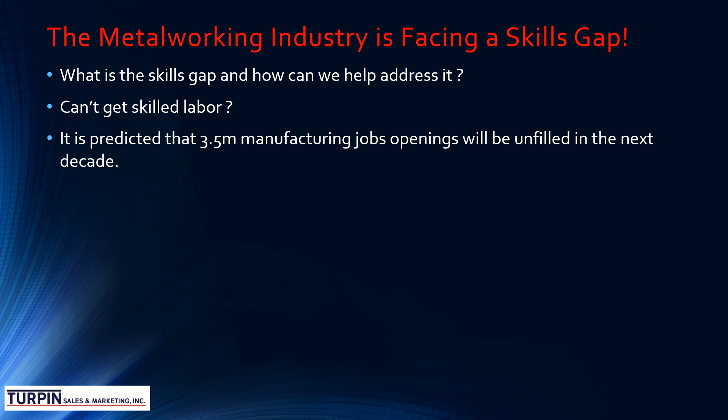The metalworking industry is facing many challenges right now: supply chain, material availability, but I believe the biggest one we're facing is the skills gap. So what is the skills gap and what can we do about it? The skills gap is basically a shortage of skilled labor in the manufacturing and machining industry. No one's going to trade school, no one's doing apprenticeships, skilled labor is very difficult to find. It's predicted that 3.5 million manufacturing jobs will be unfulfilled in the next decade, which will be devastating for this industry. So what can we all do to improve this situation?

Do you have existing employees that have an interest in manufacturing? Maybe you hire a person with mechanical aptitude, good work ethic, but no manufacturing skills. So what's the solution? Train your own. So Turpin Sales and Marketing have put together a very basic series of training presentations to help inspire people who may want to know more about this industry and help bridge the skills gap.

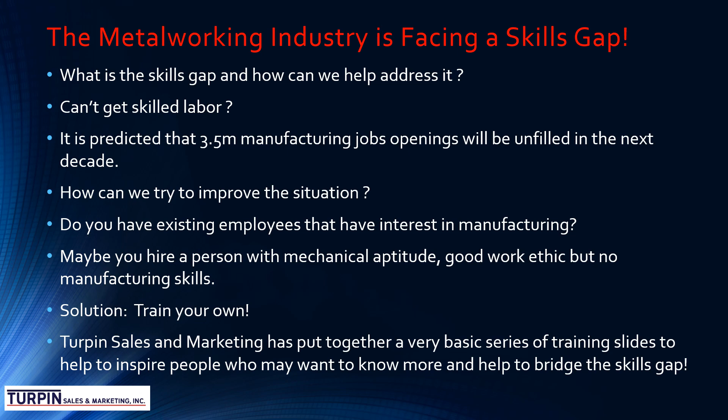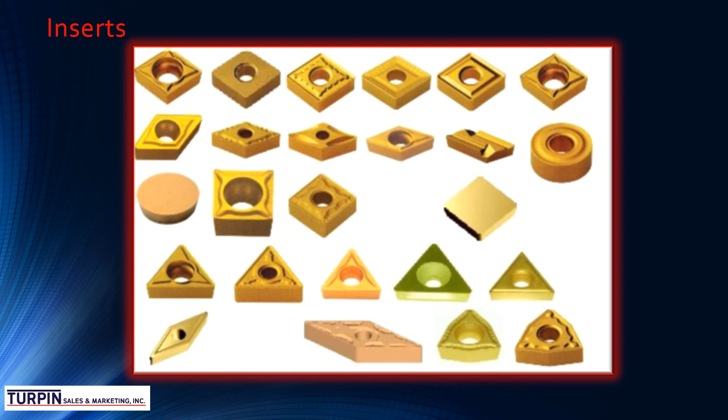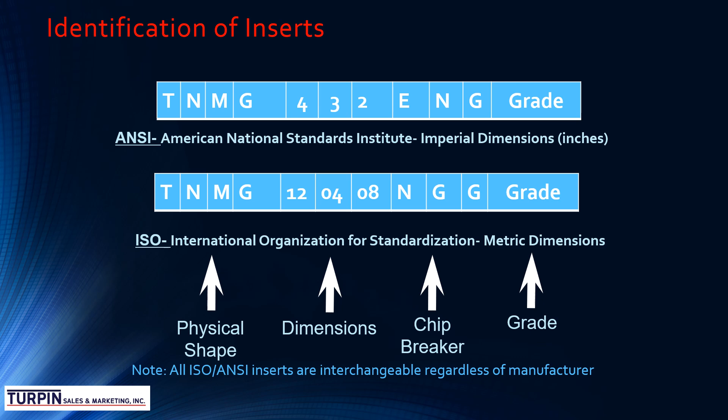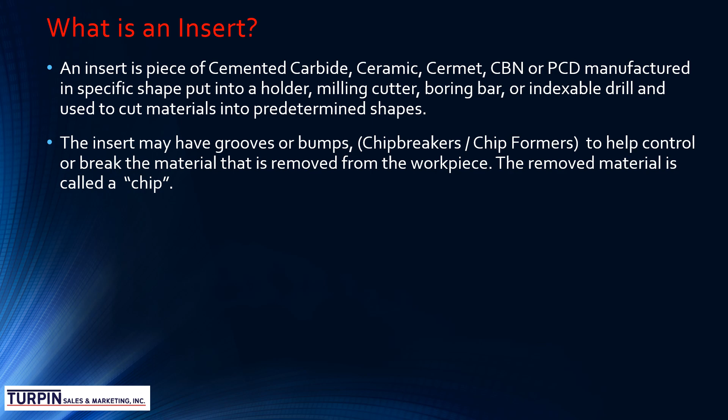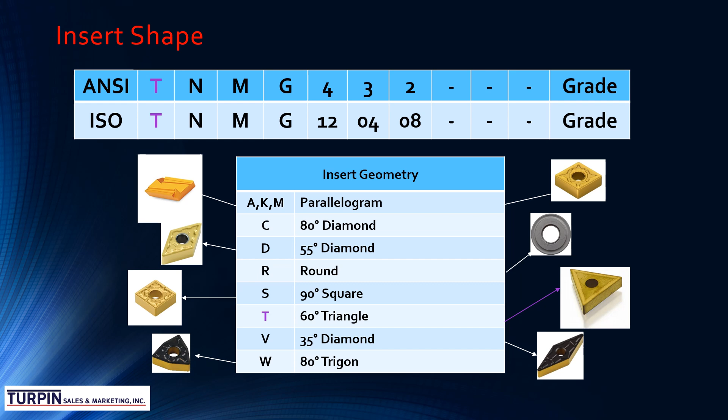We'll use this format on most of the slides: ANSI on top and ISO on the bottom. Again, ANSI is inch-based and ISO is metric or millimeter-based. So the first letter you can see in this case is T. If you look down the chart, T stands for a triangle, so that first letter really shows you the shape of the insert. I'm not going to read down them all, but you can see C is an 80 degree diamond, D is a 55 degree diamond, S is a square, etc. So in all cases, that first letter in the nomenclature describes the shape of the insert.

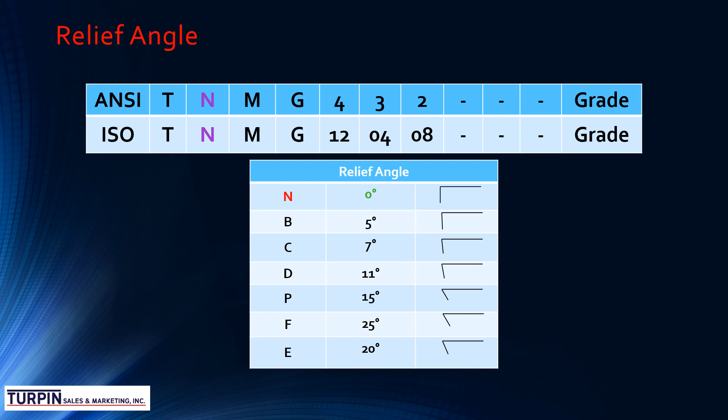I like to use the analogy of, would you try and spread butter with a knife that's 0 degrees, or would you spread butter with E, 20 degrees, the sharper? And that's the case. The 0 degrees is a stronger edge, so would generally cut harder materials. The E is a weaker edge, but would generally cut softer materials.

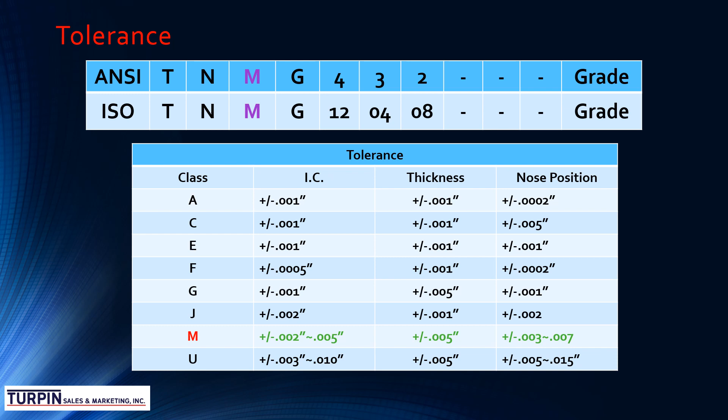The fourth of the letters, in this case G, tells us if it has a hole and if it has a chip breaker. So we'll use the G, and does it have a hole? Yes, hole referring to in the middle of the insert. Does it have chip breakers? Yes, it has a double chip breaker. And what type of hole is it? It's a straight through hole.

Just looking at another one, if we look at D, for instance, that also has a hole but no chip breakers, so it is a very plain top on the insert. And the hole has a countersunk in it. So looking at that fourth letter and referring to the chart, we can now identify what the chip breaker is and what the hole type is.

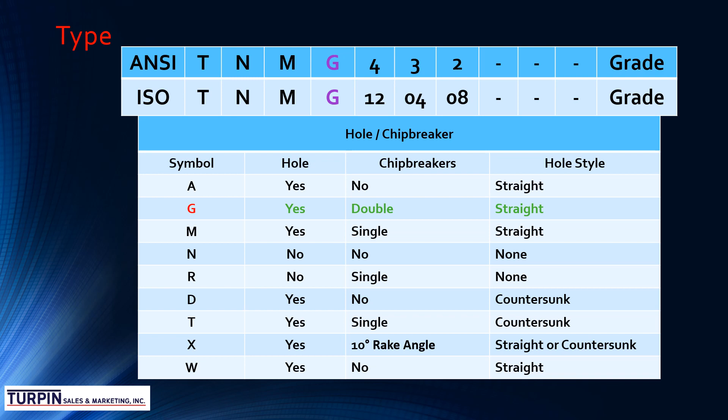We now move to the first number in the nomenclature. In the example shown here, we have ANSI with the number 4 and ISO with the number 22. This is where the two systems differ a little, as the 4 represents the size of the inscribed circle, and the 4 represents the number of eighths.

So if we look at 4 eighths, that would be half an inch. So if we look down the chart on the right under IC size ANSI, you will see the 4, which is the number, and then the size of the inscribed circle, which is half an inch, or 4 eighths. If we look further down, you'll see the symbol is an 8, which is 8 eighths, or 1 inch. So the dimensions shown there are represented in eighths of an inch increments.

The ISO is a millimeter, so 22 refers to 22 millimeters. It also refers to the edge length, not the inscribed circle, as with ANSI. You can see in the chart below, under each shape, the different edge lengths that are available. So that number, if we take a round insert, we take a 10, that number would be number 10. So that would be 10 millimeters edge length.

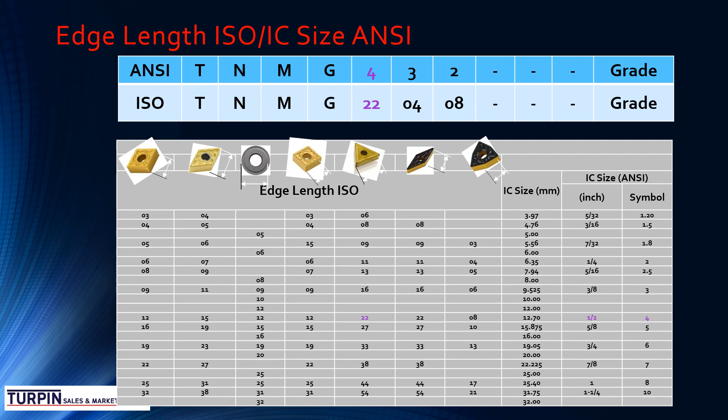The next number in the chart, the example shown here shows ANSI as 3 and ISO as 4, represents the thickness of the insert. The 3 represents 3/16. So if you look down, you'll see the number 3, and that will be 0.1875, or 3/16. If you look at the number 4, that would be 1/4 of an inch, or 4/16.

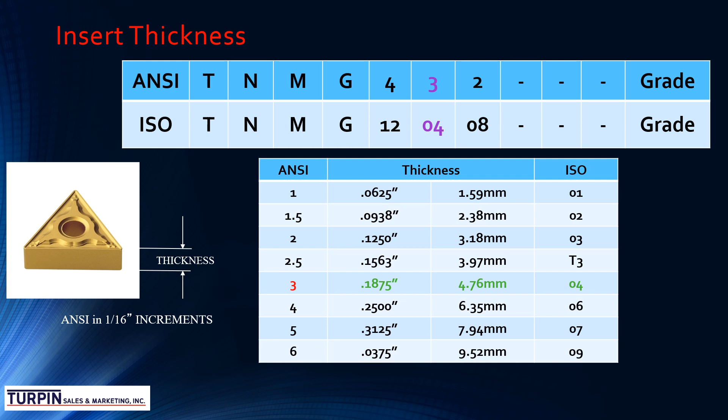The metric is very simple. It is in millimeters, so an 01 is 1 millimeter thick. The example we have here is 04, which is 4 millimeters thick. Very simple, the metric very simple. The ANSI is in 16th increments.

The next letter in the example, ANSI 2 and ISO 08, refers to the nose radius of the insert. On the ANSI, it's in 1/64th increments, so a number 2 on the chart would be 1/32nd, or 2/64ths. The metric is simple - it's a millimeter value. So 08 is 0.8 millimeters, and a 16 is 1.6 millimeters.

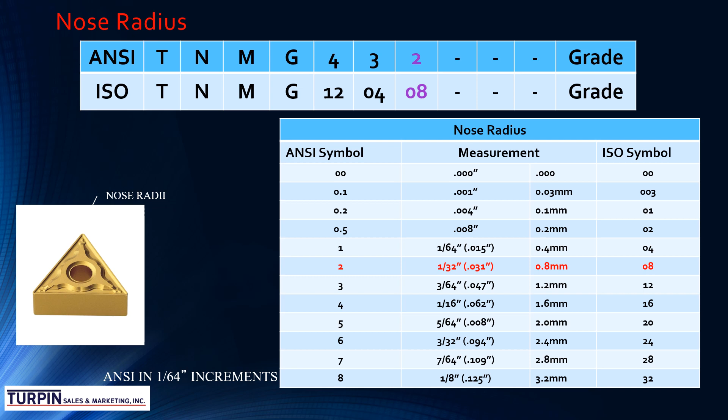The next letter in the nomenclature for ISO and ANSI describes the chip breaker or chip former. A lot of manufacturers shy away from ANSI and ISO and use their own nomenclature. So if you're using a Kennametal, I'd suggest going to their website or catalog and looking through the chip breakers. The chip breaker controls the depth of cut and feed rate, or is dependent upon it. Roughing, finishing, or general purposes would require a different chip breaker, as would different materials.

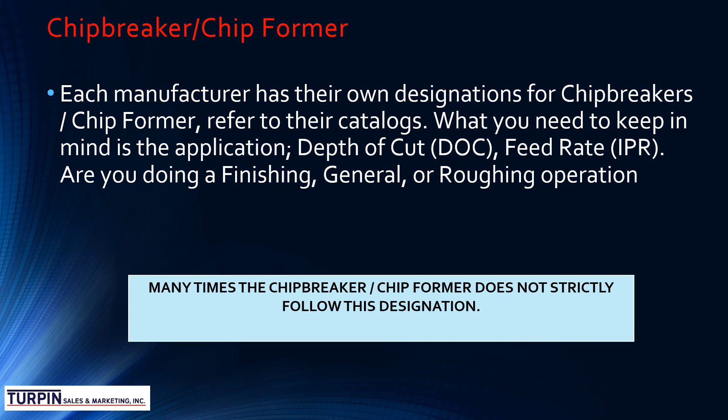That said, there is an ISO and ANSI designation for this letter, even though many manufacturers don't use it. You can see EFST - take a look at the diagram. An E would be an edge hone, so the hone is on the corner. The F would be a sharp corner, the S would be a chamfer and a hone, and the T would be a T-land. But most manufacturers don't use these designations.

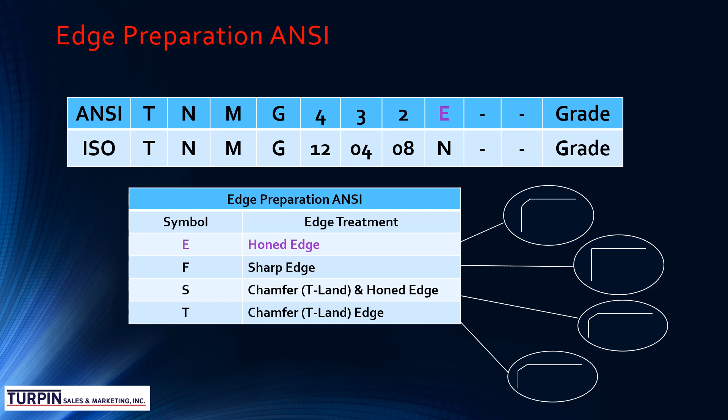The next letter, R, L, or N, refers to the direction - right hand, left hand, neutral. Really simple.

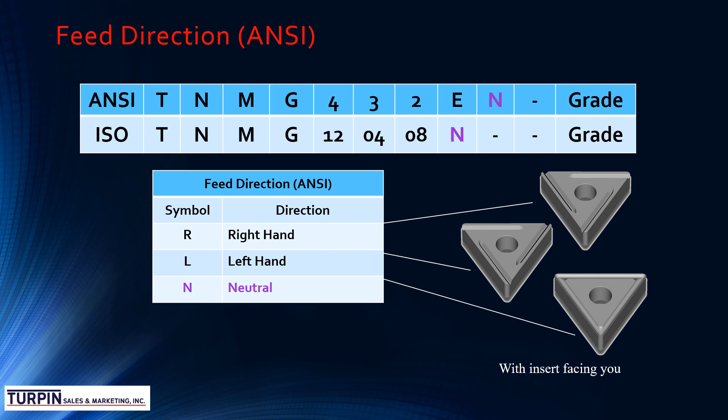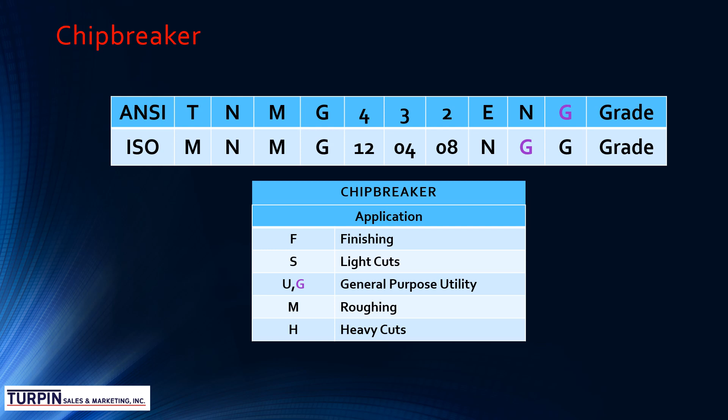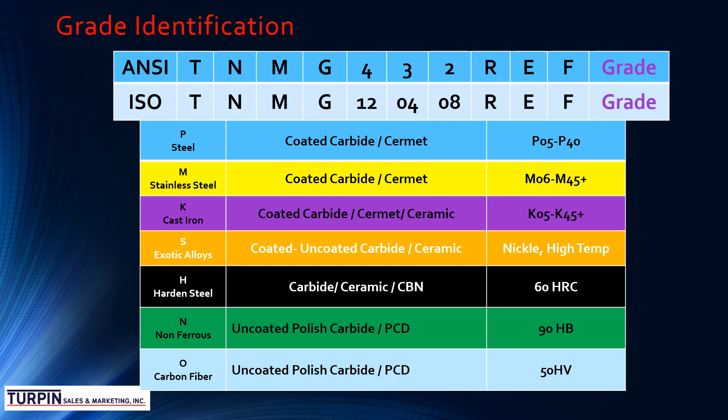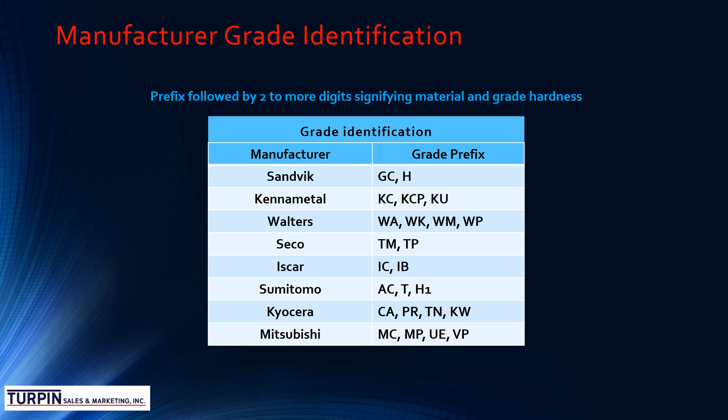As I said earlier, most of the major manufacturers use their own grade prefix. This chart may help you identify whose grade is who. Sandvik used the first two letters of their grade as GC, Kennametal used KC, Walter used WA, etc. So if you look for the first two letters within the grade of the insert, you may be able to identify who the manufacturer is.

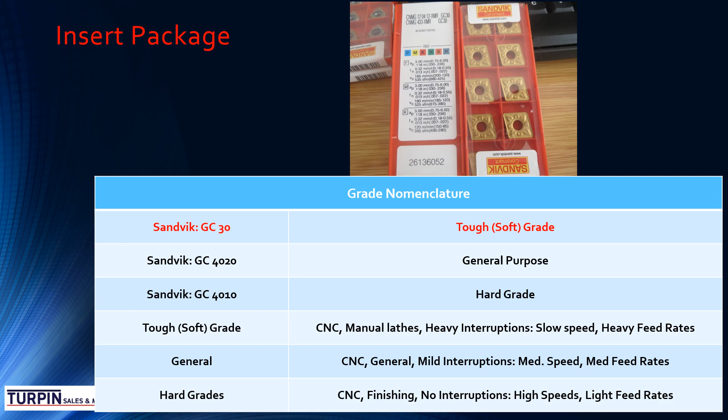That concludes this portion of the training on insert nomenclature identification. Hope you found it interesting.